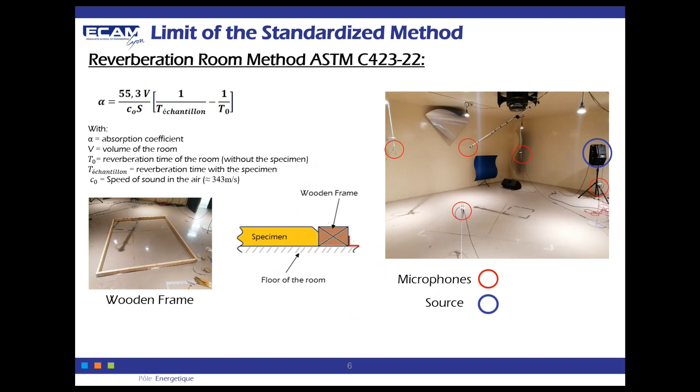I told you that we did this for 3 different materials: rock wool, glass wool, and recycled cotton. Your coefficient of absorption should be between 0 and 1 because it's physics. And what we can see is that for alpha rock wool and alpha glass wool, it's above. So it's not physically correct, and we cannot send something that is not physically correct.

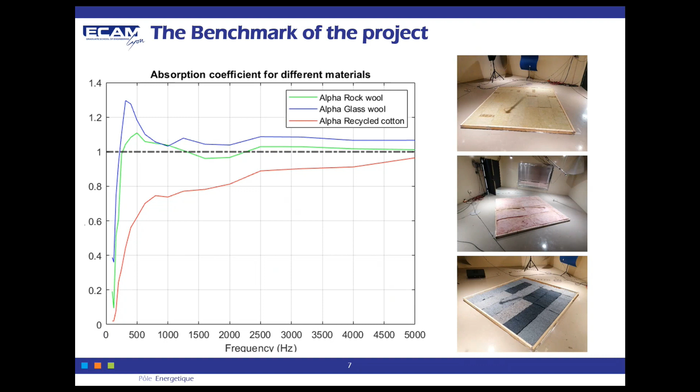That's why this standardized method is not working at all, and we should have another way. This other way is the goal of the project. It's a new way to characterize materials.

This new way, she's here. So at ETS in Montreal, they created SDC. So I will talk only of SDC. SDC is the benchmark. It's for synthèse de champ, so field synthesis. So when I talk about this, it means the benchmark here.

So basically, you have your materials, you have microphone doublets, and you have sources. You have a mesh of sources above the materials, completely with a rigid surface and free field, like in anechoic rooms where you have free field, so no reverberation. With this mesh, you will get the transfer function between those two mics, and thanks to an inversion of the LR model, you will find the property of the materials.

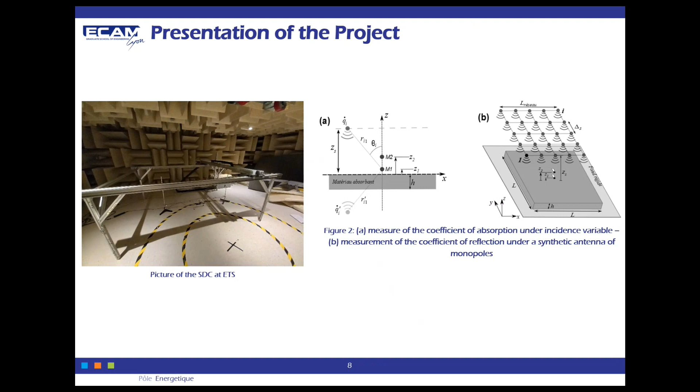So we can see that for the same materials and two different methods, you do not at all have the same results. And for SDC, it's much more reliable because you don't go above the 1 limit. But in low frequency, it's not really clean. And it's a bit of a problem for us because it's in low frequency that it's very important for us to understand how the materials will act and what their characteristics are.

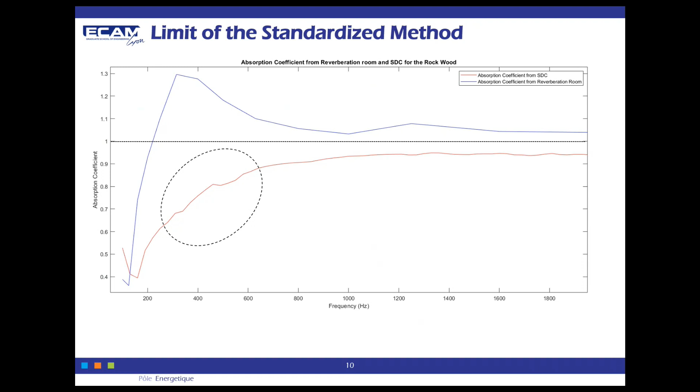So we have several hypotheses concerning those peaks and those gaps here, and I studied them. That's the second part of my work. With different software like Creo 6.0, COMSOL Multiphysics, and MATLAB, I had to study two different hypotheses. The first hypothesis was that this gap was due to the effect of the size of the materials, because in the LR model, you have an infinite size.

You don't have a finite size. But on the ETS, you have a finite size. So maybe those gaps are due to the diffraction effect of the border. And also, I had to study the impact of the structure of SDC on the measurements. So, for the first part,

first of all, I told you that we were in an anechoic room, so I have to recreate a free field. For this, in COMSOL, you have what is called a perfectly matched layer, so PML. And I had to test that my PML in COMSOL was working correctly. So I recreated in MATLAB what I should obtain with a free field. I put a real source, a symmetrical source, my rigid surface, and my microphone doublets.

With this, I recreated my free field condition with a rigid surface and a free field. Then I just got P1 and P2, and I obtained the transfer function, with all those data and the different dimensions. And then I recreated it in COMSOL. In COMSOL, I have my PML, so perfectly matched layer, so I should obtain no reverberation at all. And this is the mesh.

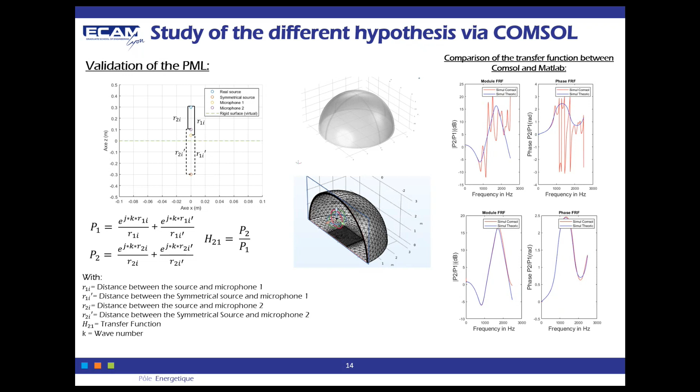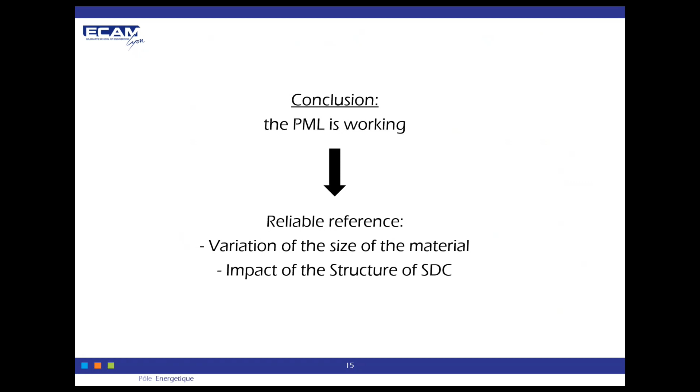So my PML is working. It means that I have reliable references and I can study the two hypotheses: the variation of the size of the materials and the impact of the structure of SDC. First, I have to present the mesh that is my reference. It's the mesh of sources of the SDC project.

When I talked about the 25 sources, it's this one in the middle. And I will also use the 22 ones. And you can see that this triangle of sources is recreated here in my COMSOL project. It's just to be on the same wavelength.

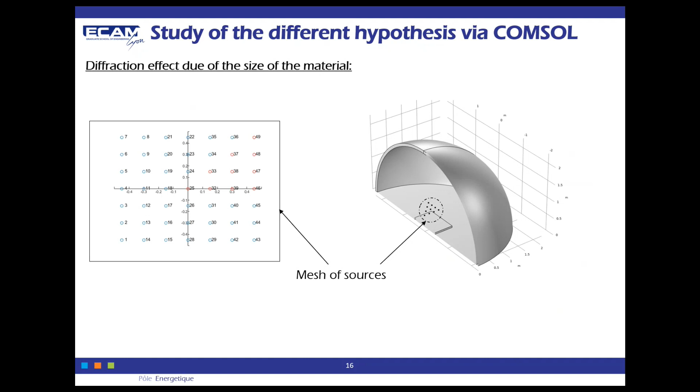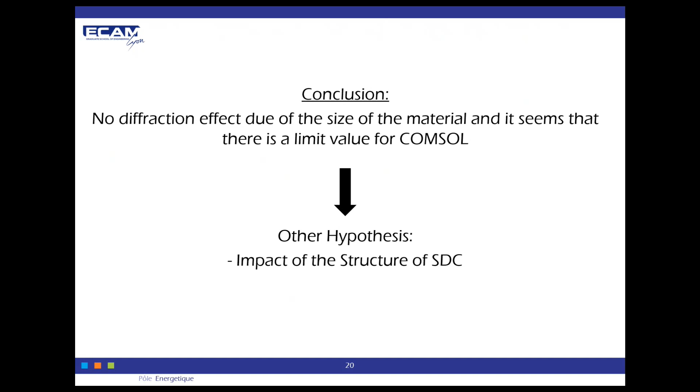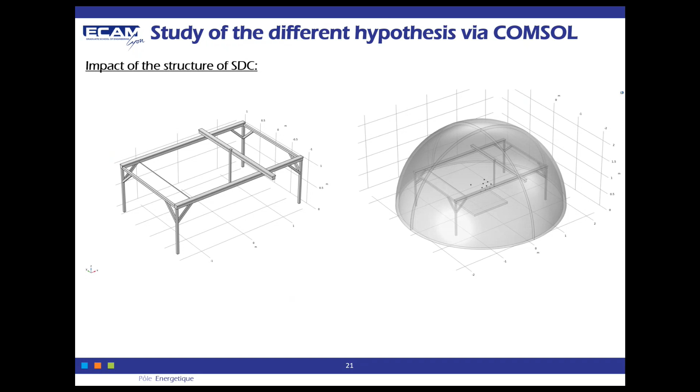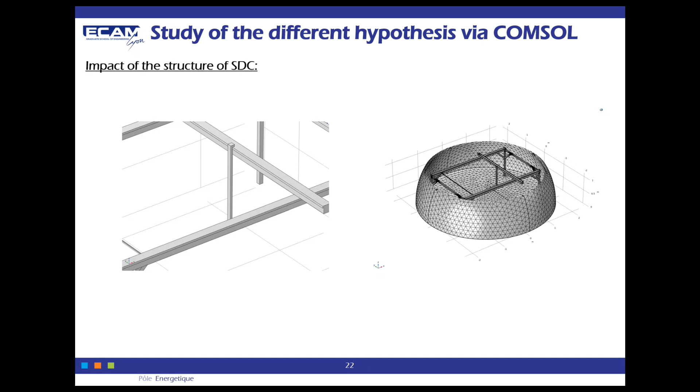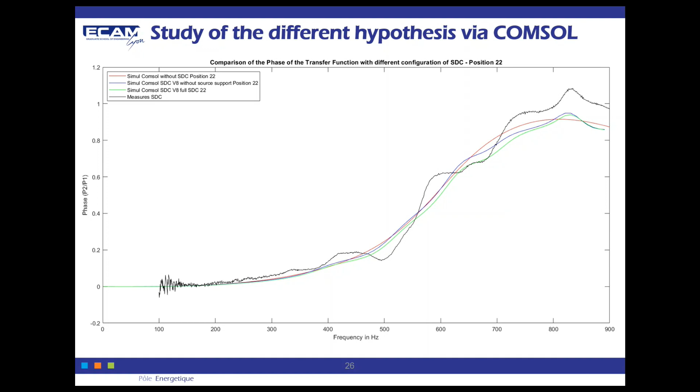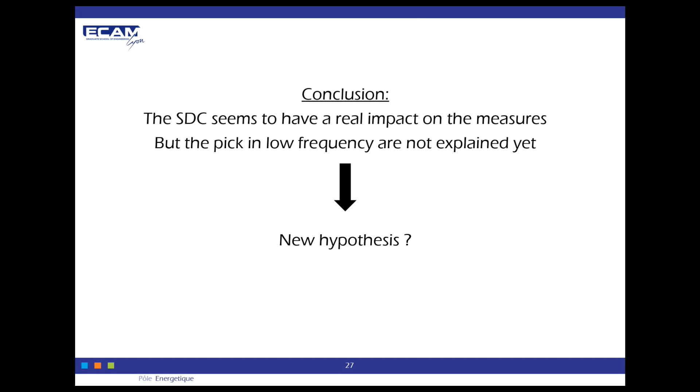So that's the last part of my job, to identify which structure of the SDC could create this. But today I'm doing other tests, so it's not finished. Sorry. So the SDC seems to have a real impact on the measurements, but the peaks at low frequency are not explained yet, and maybe there will be new hypotheses for this.

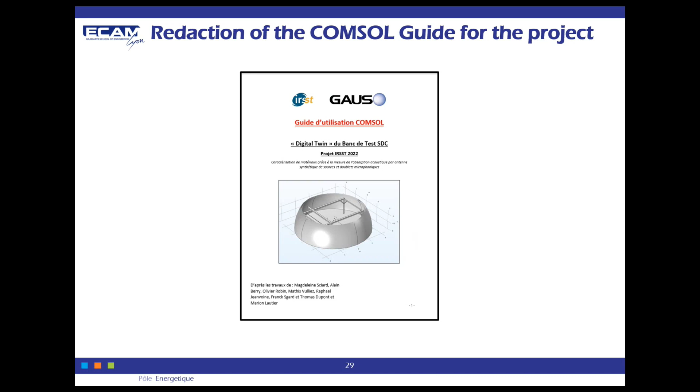Since I'm going back to France and I will not be able to work on this project again, I had to create the digital twin of the experiment by creating the French guide of my COMSOL simulation for the project. So tomorrow, if someone is on the project, he will have everything that I did, how to move things, to recreate, to change parameters. So that's the end of my internship, to write the COMSOL guide.

So to conclude, I'd like to say that that's my first time in the acoustic field. In Lyon, I was doing energy and environment. And it was for me the best opportunity because I really loved this internship. I really loved all the skills that I've learned. I really loved all the people that I worked with who helped me a lot.